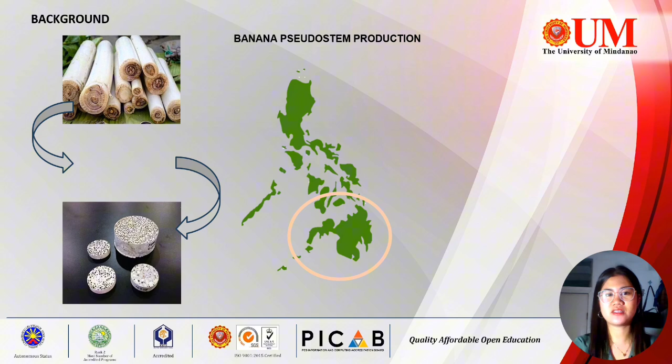The discovery of self-healing materials, or SHM, is one of the innovative solutions to mitigate concrete cracking and enhance concrete's mechanical properties. Banana pseudostem fibers, as one of the most abundant agricultural wastes here in the Philippines, specifically in Mindanao, offer significant engineering properties or benefits due to their cellulosic fiber characteristics. Reinforcing fibers as a self-healing material can significantly enhance the concrete's self-healing capacity.

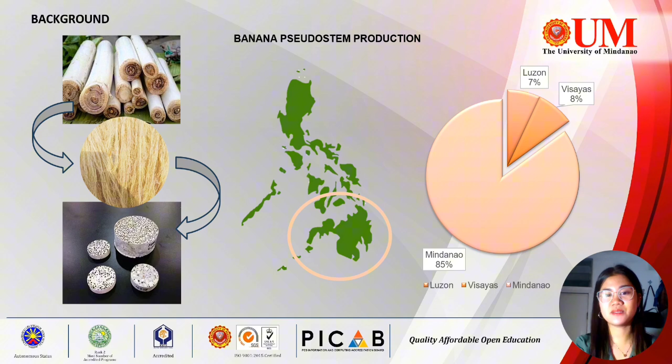From raw BPS, fibers are extracted, then it undergoes size reduction, mixed with some chemicals and other substances to produce SHM. One of the primary goals of the modern scientific world is to preserve and protect the ecosystem through the development of a sustainable research environment. Wide availability, low cost, significant endurance, and high specific strength are some of the advantages of natural fibers like the banana pseudostem fiber over synthetic fiber.

The synthesis of SHM derived from BPF involves several key processes. First, raw BPS undergoes decortication to extract the fibers, which are then dried in a rotary drum dryer to remove excess unwanted moisture. The dried fibers are ground to a 24 mesh size using a grinder mill and then sieved. The correctly sized BPF particles are then fed or conveyed into a homogenizer mixer, which is the heart equipment of our overall process, where they are combined with metasilicate and hydrochloric acid.

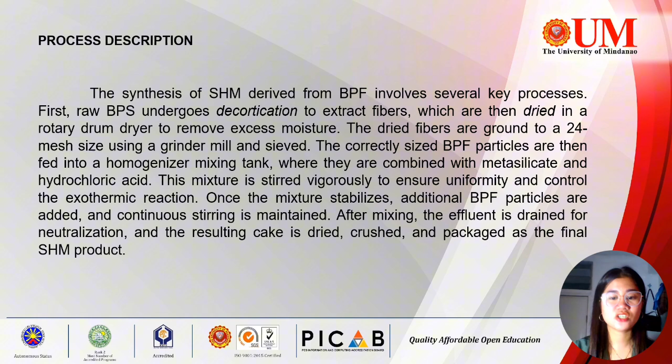This mixture is stirred vigorously to ensure uniformity and control the exothermic reaction. Once the mixture stabilizes, additional BPF particles are added, and continuous stirring is maintained. After mixing, the effluent is drained for neutralization, and the resulting cake is dried, crushed, and packaged as the final SHM product. This is a summary of the banana fiber-based self-healing material or SHM production process.

First, step 1, preparation and drying of BPF. Step 2, size reduction using mechanical crusher. Step 3, mixing process, which is the most crucial process in the overall production process of SHM. Step 4, mixture neutralization, washing, and drying. And lastly, step 5, packaging of the final product.

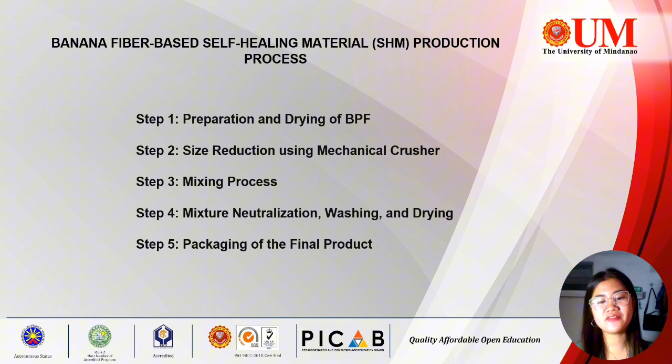This figure 2.1 shows the overall process flow diagram in the production of self-healing material. So, aside from the mixer, it shows the other important equipment that will be used in the production of high-quality SHM.

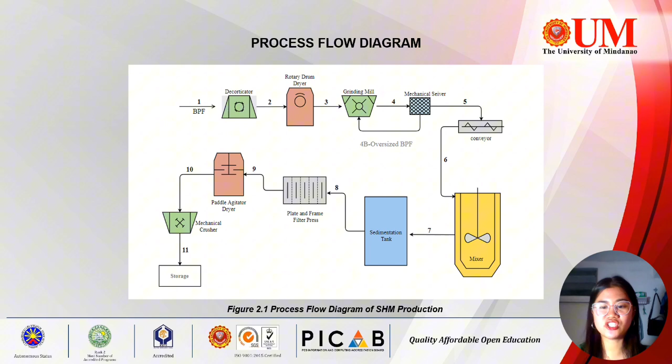Good day, sir. I am Blossom Real Salvo, and I will be presenting the material balances and the sizing parameters or dimensions of our equipment. The data that we have used here is based on the values from the process description that was given to us, having an input of sodium metasilicate around 156 kilograms, water as the medium for the reaction around 815 kilograms, HCl 192 kilograms, and an input of banana fibers of 30 kilograms.

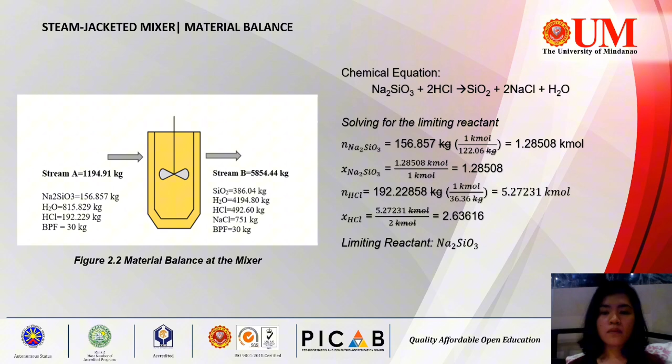So from this calculation, we have seen that the limiting reactant is the sodium metasilicate in order to form the silica. So based on those values and assuming a 100% theoretical yield, we can produce around 77 kilograms of precipitated silica, 150 kilograms of NaCl or the salt, 838 kilograms of total water from the reaction and the feed, and the remaining HCl around 98 kilograms. Therefore, we have a total of 1,087 kilograms of the salts and the liquid.

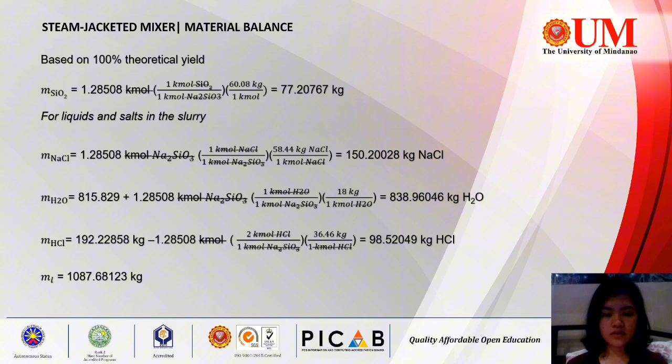The SHM or the self-healing material is composed of the precipitated silica and the banana fibers, and thus we can produce for this reaction around 107 kilograms of SHM. And the total mass within the vessel is around 1,194 kilograms. The average percent yield from the conducted experiments was around 45%, and it is very small because there are a lot of factors that compromise the yield of silica, and that includes the pH from the dropping of the HCl, the agitation of the impeller, and the heat distribution. Thus, basing on 45% yield, we can only have around 48 kilograms of self-healing material.

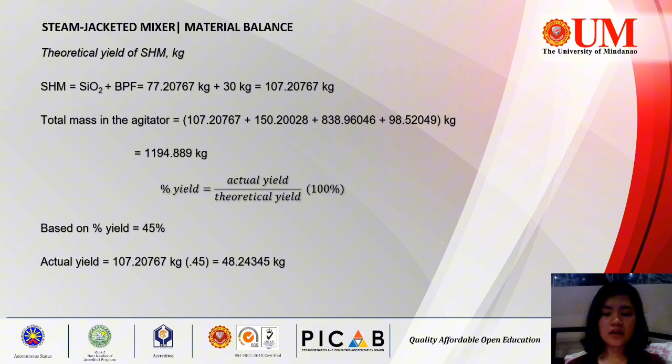The energy balance calculated revealed an exothermic process, releasing heat around 222 kilojoules, and this is mainly because of the dissociation of the sodium metasilicate.

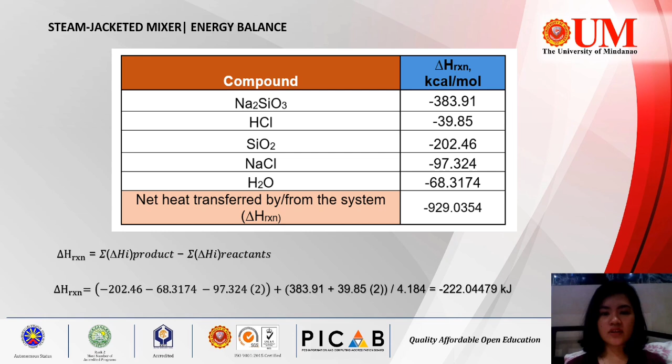For the vessel dimension, we have based it on 1.2 cubic meters of working volume, proposing that the density of the content of the materials before the reaction proceeds is relatively close to water. And as a rule of thumb, the working volume should be around 70 to 75% full. We could use 80% if we wanted to be more liberal. Thus, the vessel capacity is around 1.6 cubic meters. So from these values, we can scale it up if we want to make the equipment bigger for the plant design.

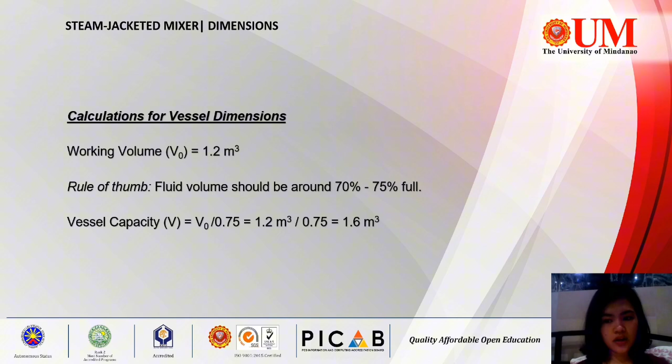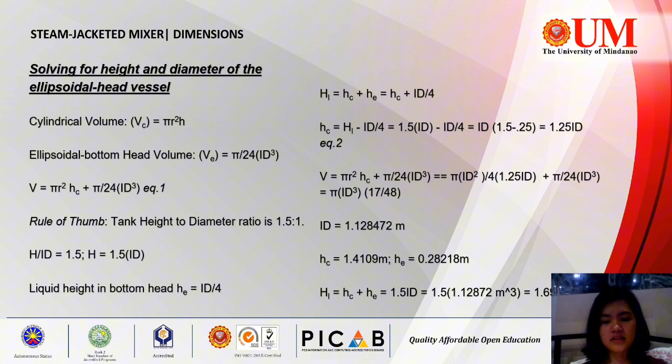To calculate the vessel height and the diameters, we have calculated the volume of the cylinder and the ellipsoidal bottom head, and we have calculated an inside diameter of 1.13 meters. So for the minimum wall thickness, from the cylinder we have obtained 0.55 meters, and also for the bottom. Since we want it to be more safe, we have added 3 millimeters, and that also includes the corrosion allowance if that happens. So we have a minimum wall thickness of 8 millimeters.

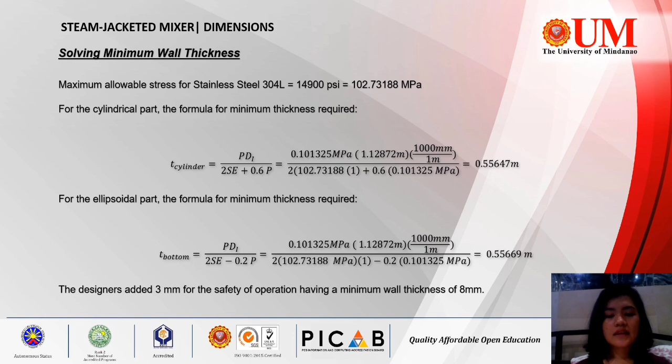So using those values, we have obtained an outer diameter value of 1.14 meters and a total height of 1.7. We have also solved for the liquid height, and as a rule of thumb, liquid height must fall between 0.7 to 0.8 ratio of the tank height. The Z value is important to calculate other design parameters in constructing a mixer equipment. So the Z value, when we conduct the process, should be around 1.35 meters, and the ratio should be around 1.2, and that is a reasonable value already.

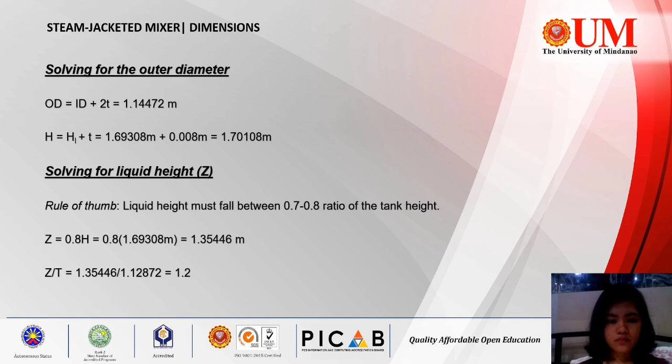There are a lot of heuristics for calculating the impeller dimensions, and to avoid confusion, we based it on the information that we have read from the Perry's Handbook, in which for the suspension of fine solids in non-Newtonian fluids that may exhibit laminar flow, shear rates may become low and negligible. Hence, large diameter impellers may be used, with the ratio of the impeller diameter, dA, and the tank diameter, dt, greater than 0.6, and an impeller diameter greater than dt over 2 would be beneficial to avoid dead zones, have short mixing times while maintaining uniformity and laminar continuous averaging of slurries.

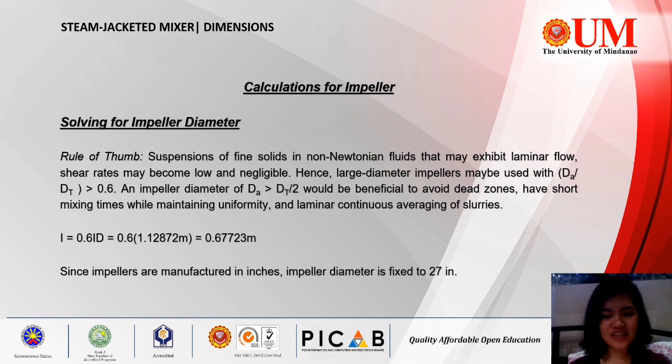So using 0.6 value, we have obtained that the impeller diameter is around 0.67 meters. And since most of the impellers being manufactured are in inches, we have used 27 inches for the impeller diameter. And solving for the impeller position, as a rule of thumb, the C/T value should also fall in the 0.1 to 0.4 ratio. There are a lot of heuristics for the impeller position or the clearances, but generally we have used that the bottom clearance should be 1/3 of the liquid height from the bottom of the vessel. Thus, we have calculated 0.45 meters for the bottom clearance.

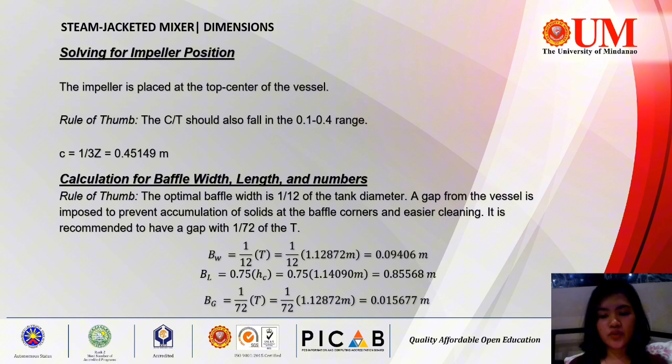So for the surface area, we have just substituted the values that were calculated previously, and thus we have a total surface area of 6.49 square meters. And for the mixing vessel cost, using the stainless steel 304L, we know that it is around 43,000. This costing is relatively small compared to others, but we have to take note that this is just for the vessel alone, and it excludes the material needed for the construction of the steam jacket, which would add additional costs, and the equipment itself used for the plant is replicated 3 to 5 times, possibly. So this equipment use is not just one.

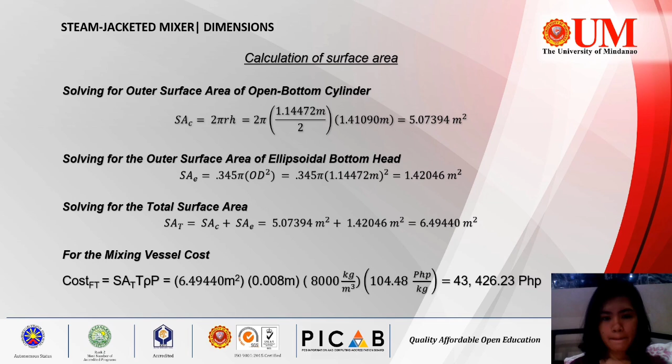So, the rheology, or the fluid dynamics of agitating silica precipitation process, is difficult to determine due to the non-Newtonian behavior and the non-linear profile of the fluid. And this reveals that it is very experimental in terms of calculation of the time of agitation, the suspension of fibers, and more.

But we are able to calculate the pumping rate and the power, using a pumping number of 0.4 and power number of 0.7, which are dependent on the type of impeller being used, and in this process we have used pitch blade turbine because there is a lot of information that we could get compared to hydrofoils and helicals.

So we have solved that the amount of fluid being displaced is around 9,800 GPM, gallons per minute, and the horsepower is around 17.8 horsepower, and the torque using the power that is solved is around 3,739 inch-pounds.

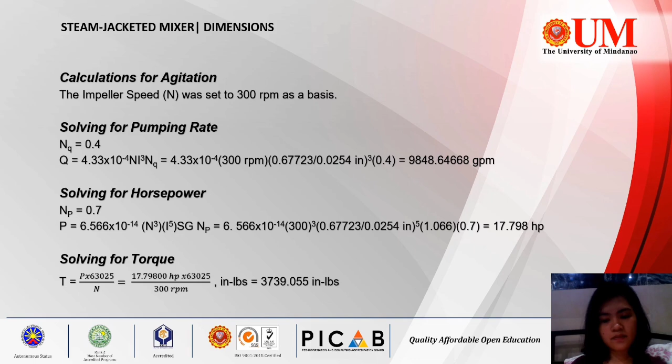The production of nanocellulose from banana pseudostem involves several key steps, starting with the pre-processing of the pseudostems through cleaning, cutting, and drying to reduce moisture content and facilitate further processing. Each of these agitator types offers unique advantages for different stages of nanocellulose production, from initial laboratory research to large-scale industrial manufacturing. The most used agitators in the industry are as follows: pitch blade turbines.

They ensure uniform distribution of healing agents, create vascular networks for efficient healing agent distribution, and incorporate heating elements to maintain optimal temperature without degrading material properties. However, balancing mixing efficiency with energy consumption remains a challenge in their design optimization.

Hydrofoil impellers. Hydrofoil impellers are efficient mixing devices that minimize shear forces, making them ideal for self-healing materials. Their design uses less power, mixes faster, and reduces the risk of material damage. However, they can cause damage if energy dissipation isn't controlled carefully.

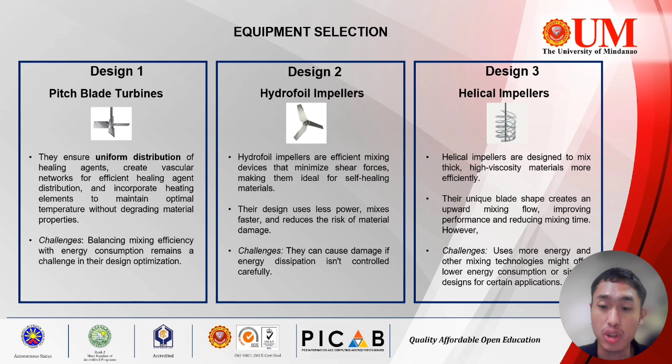Then, the helical impellers. Helical impellers are designed to mix thick, high viscosity materials more efficiently. Their unique blade shape creates an upward mixing flow, improving performance and reducing mixing time. However, they use more energy, and other mixing technologies might offer lower energy consumption or simpler designs for certain applications.

A trade-off analysis is a crucial step in taking into account which aspects weigh more in design considerations. Choosing the most appropriate design using these parameters would ensure the safety and efficiency of self-healing material production. The most significant parameters were listed in evaluating the most suitable equipment. First, manufacturability. This limitation focuses on the construction of the equipment.

Then, economics. The equipment is designed considering the integrity of the impeller, preventing the possibilities of replacement and repair, as this is where the project's financial viability rests. Performance. This is the project's social impact. Then, sustainability. The equipment's viability and long-term operational life cycle.

Pitch blade turbines, hydrofoil impellers, and helical impellers are distinct types of mixing devices, each designed for specific applications and flow characteristics. The results from the conducted trade-off analysis shown in Table 1 show that the pitch blade turbine is the most preferred design for the chosen constraints with a weighted score of 4.0. This implies that the pitch blade turbine impeller is the most manufacturable, economical, efficient, and sustainable among the three design options.

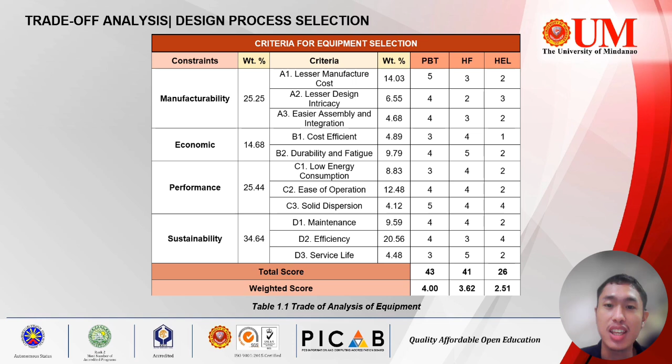The process of developing a jacketed stainless steel mixer involves two main stages: selecting suitable materials and evaluating cost ratings. Initially, materials are screened based on their properties and cost, with the best options identified separately. The Pugh matrix method is employed for ranking and eliminating options, which is essential for ensuring the equipment meets performance, durability, and industry standards while also achieving cost efficiency.

When selecting materials for a jacketed mixer, several constraints must be considered to ensure optimal performance and safety. These constraints include thermal conductivity. High thermal conductivity allows for efficient heat transfer, especially in flowable compositions. Fabrication and machinability. Balancing machinability and fabrication is crucial. Fabrication requires easy-to-shape steel without compromising structural integrity.

Corrosion resistance. Mixer design is crucial for durability, with steel containing elements like chromium, aluminum, and silicon. Weight and structural integrity. The design of the mixer is crucial for its performance and safety, as it requires careful consideration of steel's weight and structural integrity. Mechanical strength. Mechanical strength is crucial in mixer design, ensuring durability and performance under operational stresses.

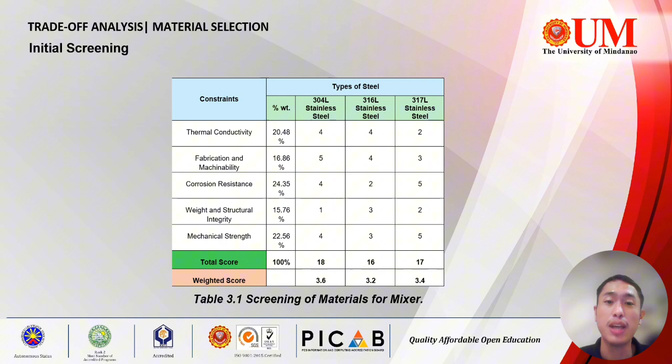Table 3.1 shows that the mixer's entire performance is heavily reliant on corrosion resistance with a weighted score of 24.35%. Furthermore, the preceding data show that 304L stainless steel received the highest weighted score of 3.6 among all materials. As a result, 304L stainless steel is better suited for developing a mixer with appropriate material qualities.

A cost assessment was conducted to determine the expenses associated with potential materials for mixer design, focusing on factors like density and tensile strength. A structured cost rating equation was used to identify the most suitable material, ensuring a balance between cost and essential properties for effective design. The systematic approach enhances design efficiency, but it acknowledges the potential challenges of material properties varying significantly.

The cost rating of various engineering materials are displayed in Table 3.2. 304L stainless steel has the lowest score at 0.00148199. This makes it a cost-effective choice for mixer construction when prioritizing expenses. Furthermore, 317L stainless steel should be taken into consideration in order to satisfy certain equipment material criteria. It costs significantly more than 316L stainless steel, however, it has better qualities and performance for specific applications.

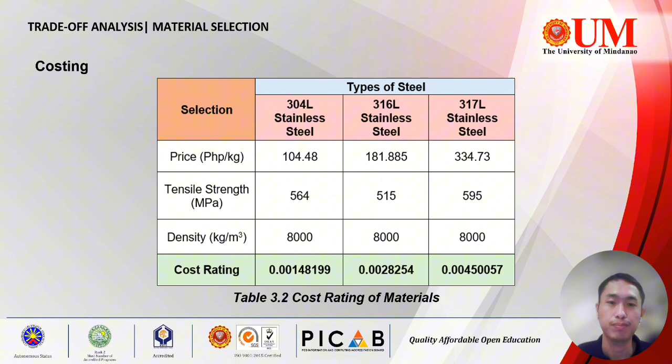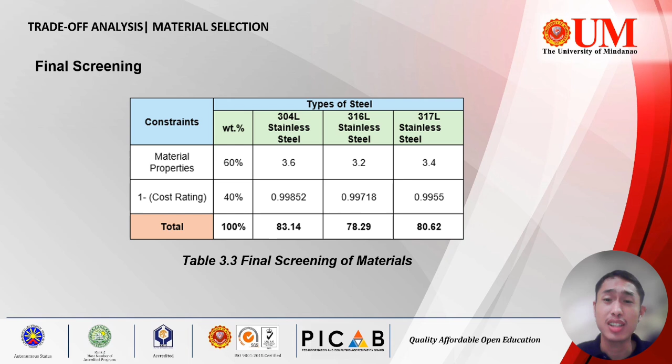304 stainless steel is a popular choice due to its corrosion resistance, stability at high temperatures, and strong mechanical properties. It is used in marine and pharmaceutical industries, healthcare, and chemical processing. Its performance in harsh environments like nitric acid is critical, and its mechanical properties make it suitable for high-stress applications like oil and gas operations. However, its performance can vary significantly based on environmental conditions and alloy compositions.

The shape of mixer vessels significantly influences mixing efficiency and product quality. Various designs cater to specific mixing needs, optimizing flow dynamics and material interaction. Mixer vessels come in various shapes designed to optimize mixing efficiency for different applications. Here are the three notable shapes. Cylindrical mixer with dish head bottom. This design features a vertically oriented cylindrical wall that transitions into a shallow round bottom.

Translating rotating mixer. This mixer consists of a large circular cylinder filled with fluid stirred by a cylindrical rod that can both translate and rotate. Symmetrical mixing chamber. This design features a symmetrical outer mantle with two end walls and rotating paddles inside.

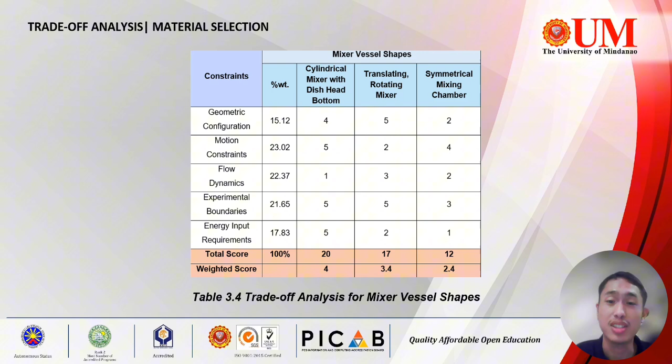The most commonly used mixer tank shapes mentioned will be analyzed based on the constraints identified. This includes geometric configuration, motion constraints, flow dynamics, experimental boundaries, and energy input requirements. The cylindrical mixer with dish head bottom was found to be the most optimal shape for maximizing the overall productivity of the self-healing material mixing process within the specified constraints, as indicated by the calculated findings in Table 3.4.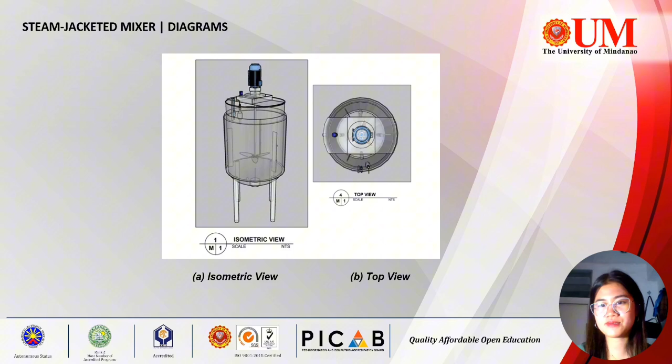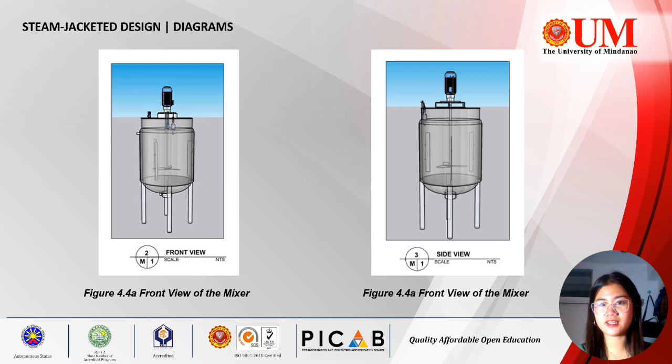In conclusion, the Philippines faces frequent natural disasters, compromising its infrastructures. Concrete, as a widely used construction material, is prone to cracking, leading to long-term damages. That is why self-healing materials, or SHM, especially those reinforced with banana pseudostem fiber, offer a sustainable solution to improve concrete durability and reduce environmental impact. The increasing demand for SHM is driven by the need for sustainable construction materials that lower maintenance costs and extend the lifespan of the structures.

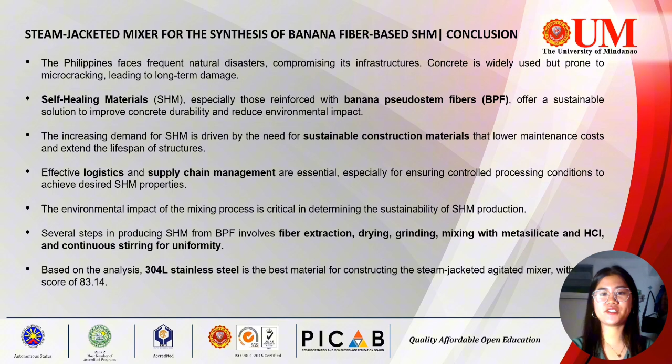Effective logistics and supply chain management are essential, especially for ensuring controlled processing conditions to achieve desired SHM properties. The environmental impact of the mixing process is critical in determining the sustainability of SHM, and based on analysis, 304L stainless steel is the best material for constructing the steam-jacketed agitated mixer with a total score of 83.14. For the mixer design, factors include impeller choice, fluid velocity, and uniform heat distribution. Steam heating is preferred for its cost-effectiveness and safety, preventing agglomeration and maintaining material quality.

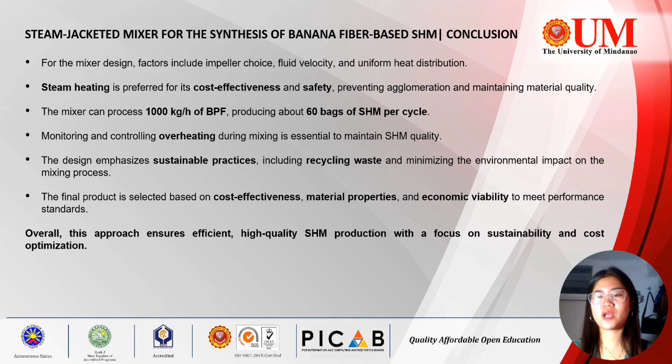The mixer can process about 1,000 kilograms per hour of BPF, producing about 60 bags of SHM per cycle. Monitoring and controlling overheating during mixing is essential to maintain SHM quality. The final product is selected based on cost effectiveness, material properties, and economic viability to meet performance standards. So overall, this approach ensures efficient, high-quality SHM production with a focus on sustainability and cost optimization.